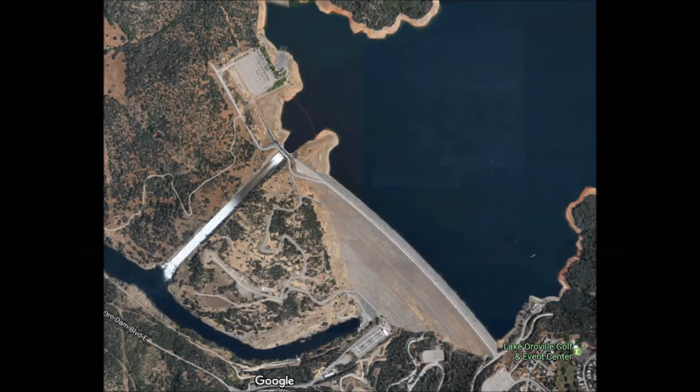The repair work at Oroville Dam has just begun.

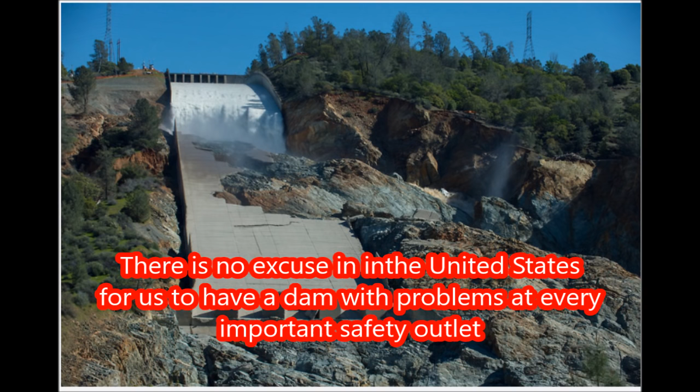In a recent report from an independent board of consultants on the Oroville emergency recovery, released this week by the California Department of Water Resources, it was concluded that a very significant risk would be incurred if the gated spillway is not operational by November 1st, 2017. But it placed little faith in the possibility that it can be done, acknowledging that this is a very demanding schedule.

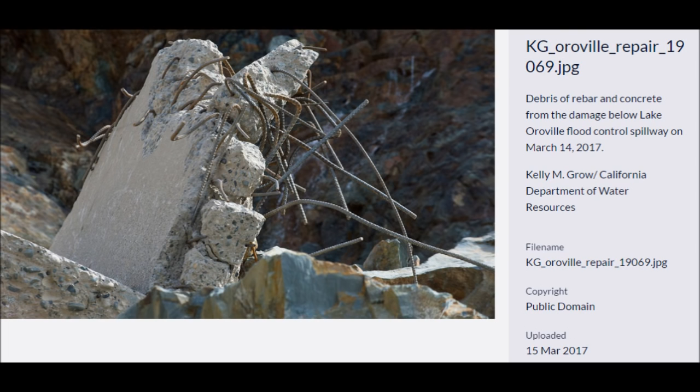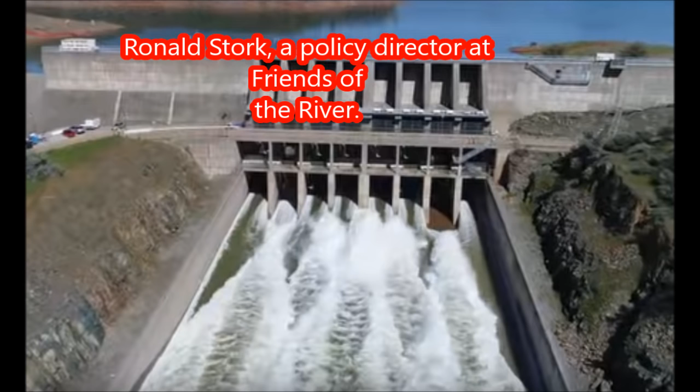To understand the implications of the report, Ronald Stork said, 'If the main spillway is not returned to service before the next flood season, we'll face the same dilemma we faced this season: every time we use the main spillway, we are at risk of damaging it further, of throwing more material from the foundation into the afterbay, potentially tipping off the power release at the Hyatt Powerhouse.'

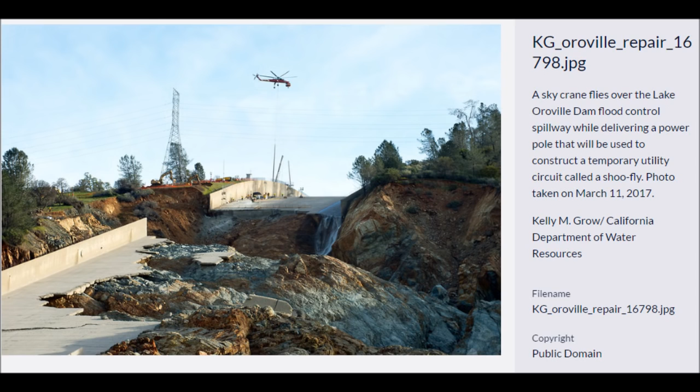He also said, 'I think their perspective is that they would like to have it up and running with a full construction effort running 24 hours a day, sequenced, so individual trucks are not in the way of other trucks, just this sense.'

The conveyor belt of work is aimed at building a foundation under the broken parts of the main spillway and rebuilding the broken parts of the main spillway, and that's going to take 24-hour-a-day efforts.

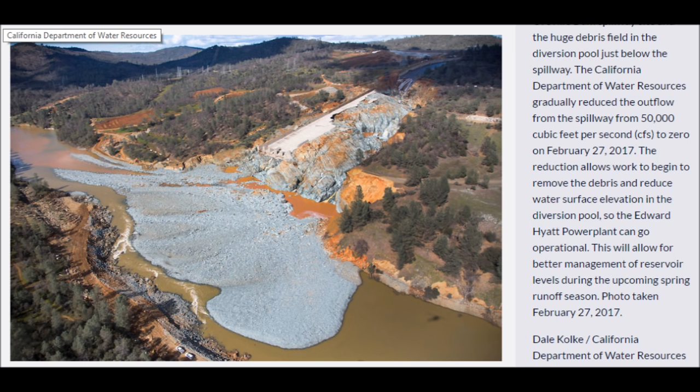No one knows what work that spillway will need, and we do not know what shape the rest of the spillway is in closer to the top of the dam.

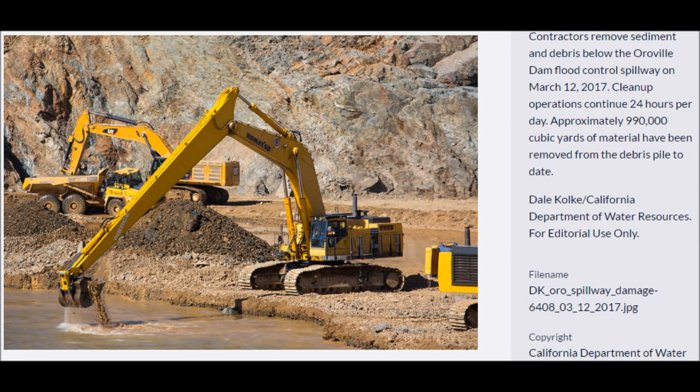Not only that, asbestos has been found — a very dangerous form of asbestos has been found in the rocks in the spillway. This is important because, first and foremost, many of the men who were working on debris removal in the afterpool will have been subjected to exposure to asbestos.

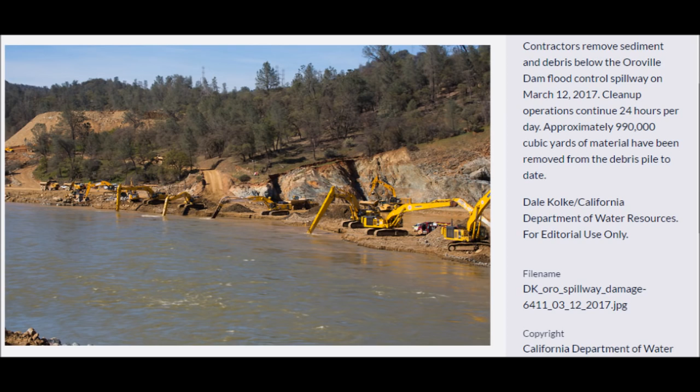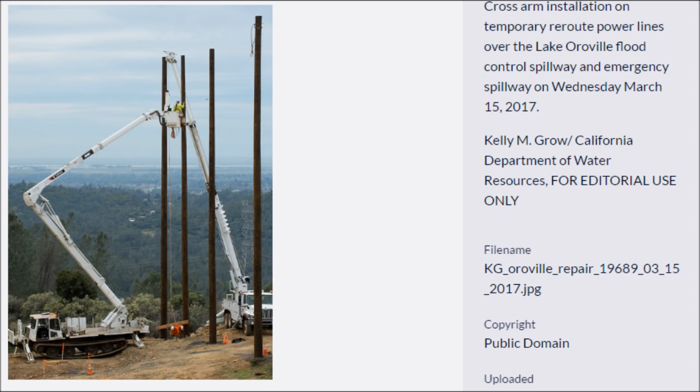This will have long-term health effects for them. Not only that, any construction worker working at this site needs to be asbestos certified, and the construction company needs to be registered and certified to handle asbestos debris removal in the state of California. Any other construction company or workers there need these same approvals.

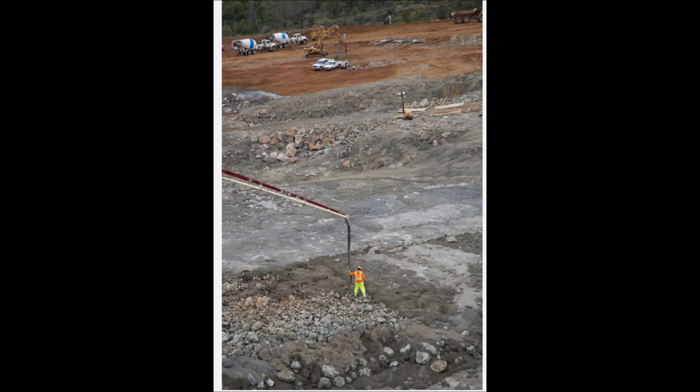This will run the cost of repairing the spillways at Oroville Dam up astronomically.

The report from the Independent Board of Consultants did not even mention the word asbestos. Everyone who's ever torn down a building or worked on a property with asbestos knows that it significantly raises the cost for any kind of construction work where asbestos is present.

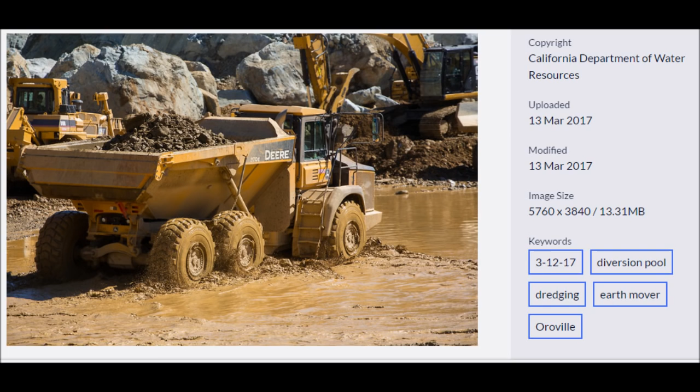I had a house one time that I had to remove that had no asbestos in it, but I couldn't prove it because the house had caught on fire. So I had to have the site removed as if asbestos was present, setting up air monitoring and having water sprinklers to sprinkle the property down. When it was all over, there was no asbestos in the structure. However, it took 4 times as long to remove the material, and it also cost 3 times more than if I had just brought in a loader and scooped up the material and done the job quickly.

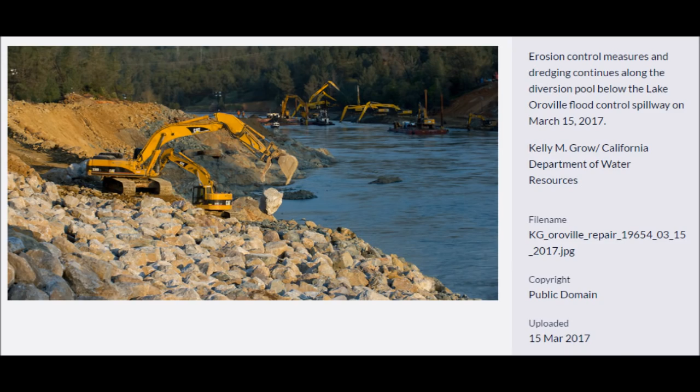So everyone in construction knows that when you have asbestos, it significantly and adversely affects both the price of getting a job done and the timing.

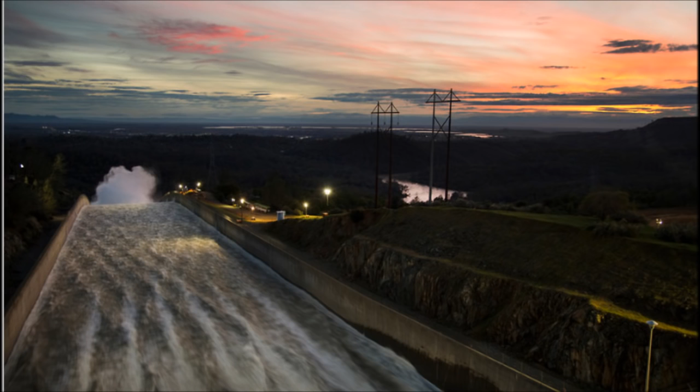Therefore, I doubt that the spillway repairs can be made before November 1st. It's likely going to take many years. And if their current cost estimate is $500 million, I would say you might want to consider $2 or $3 billion for the repair costs at Oroville Dam.